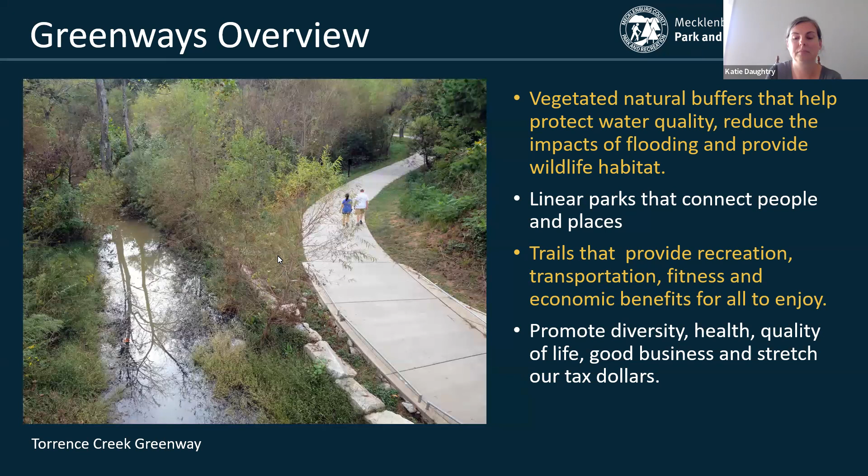In both of our community surveys done with our master planning efforts back in 2015 and then the current one in 2020, greenways have been the number one amenity requested by residents. Our current master plan calls for over 300 miles of greenway trails along creeks and streams and 200 miles of urban trails that would run along roadways and through urban areas. Currently, more than 55 miles of Greenway trails are complete, with a goal to add 30 miles of new trail between 2019 and 2023. To accomplish that goal and meet community demand, we and our partners are working on an accelerated Greenway plan that includes over 40 miles of trail currently in design or construction.

This is a map of those two programs: our capital improvement funded projects, which run from 2019 to 2023, and our accelerated Greenway projects. So Briar and Little Hope Creek was a capital improvement plan funded project, meaning it was funded through that 5-year cycle by the Board of County Commissioners.

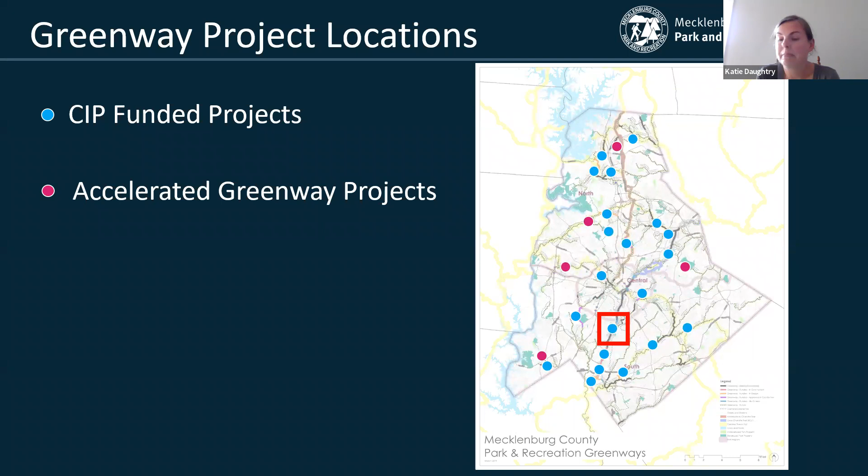The section in the middle is Cross Charlotte Trail, currently under construction by the city, running from Brandywine Road to Tyvola Road. The last segment on the right is Briar Creek, running from Cross Charlotte Trail under Park Road to Manning Drive. These 3 critical pieces of our Greenway system will connect thousands of residents through an uninterrupted, mostly off-road experience of trails.

To places like Uptown, Pineville, Ballantyne, and Noda. In total, these sections of trail, once complete, will connect to over 5 miles of existing trails to the north and 16 miles to the south.

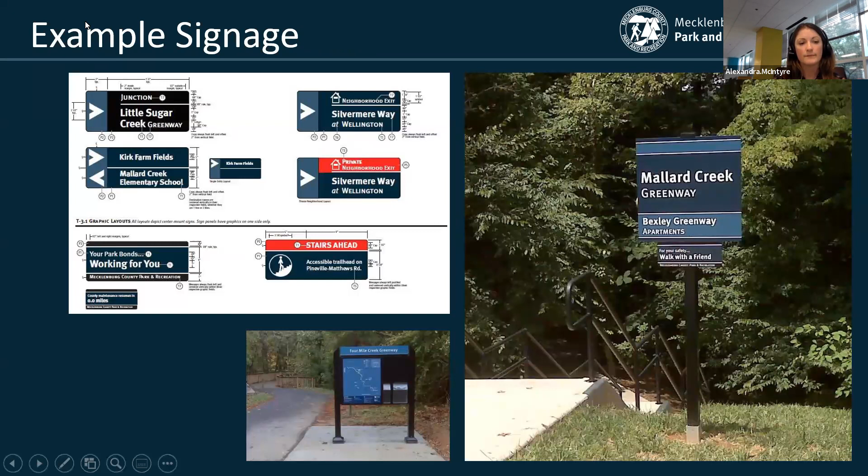Thank you, Alex. So I'm sure for those of you who've been on our greenways very much at all, this will look familiar to you. This is an example of our wayfinding signage package that we use across the entire county.

We have pedestrian scale signs at entrances and along the trail to indicate mile markers. At points, we also include kiosk signage to show maps, rules, and other important information. In addition to signs, benches, garbage cans, and mutt mitt stations will also be provided at various points along the trail.

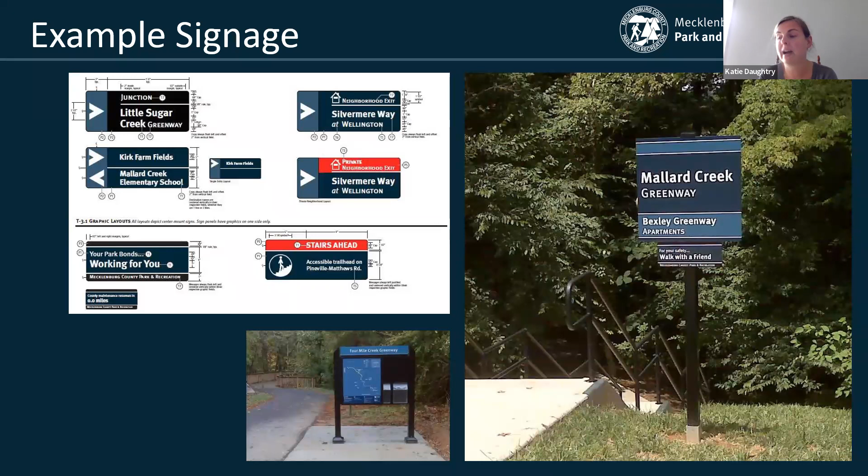So again, just to recap, we are currently in design on this project, and we're about halfway there, I would say. We hope to wrap that up sometime in the fall, with the idea that we would go out to bid in the winter and start construction sometime in the spring.

So before we open it up to this group for questions and answers, I would like to touch on some questions that came through the public input site, because obviously we get feedback there, and we want to make sure that the entire group gets the benefit of hearing some of those questions and answers as well.

So the first one that came through is a question about whether we were planning to add any trail off Seneca Place. Currently the closest planned trail to Seneca Place will be the connection off Keystone Court, which is that northwestern, uppermost portion of the project. I have a map on the next page that we can refer to if we need to moving forward.

The next question we got was just a general concern about tree cutting. So the alignment is meant to reduce impact to trees as much as possible. But of course, with anything like this, some trees will be removed as part of the project.

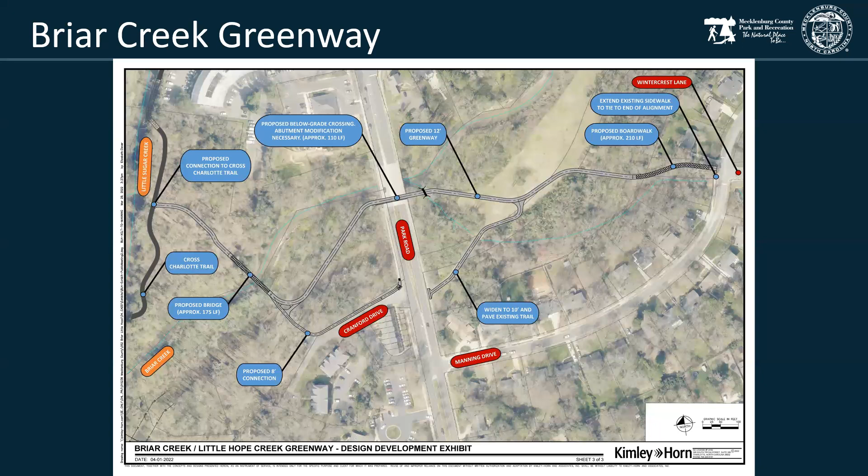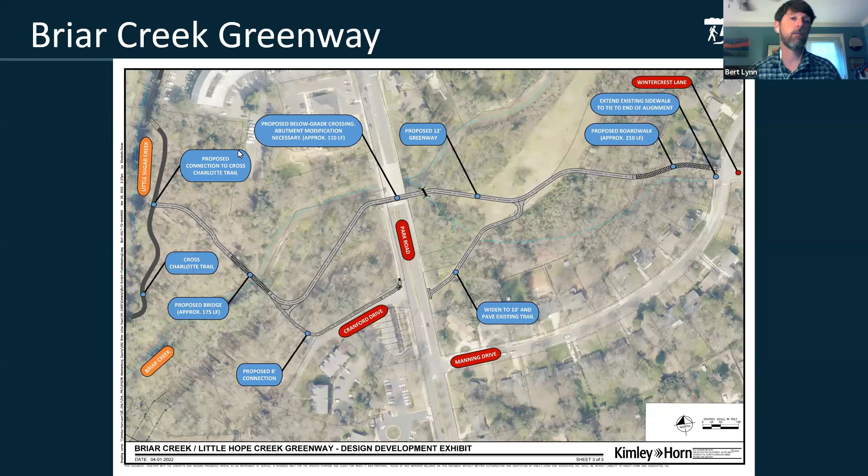So the next question was about some tree clearing that I think is going on now. We haven't started any site work whatsoever as part of the Greenway. So I'm not sure exactly where that would be within the site, and whether or not it may have been part of the work that Charlotte Water was doing with the sewer trunk line

Yeah, maybe I can provide a little additional clarification. So if you can see my cursor, this is Valley Stream here, and the Charlotte Water Project follows behind those houses, but on park property across the creek in this area before it turns north, kind of sandwiched between two rows of homes facing different streets. There was a significant amount of tree clearing that had to be done for that project through the park. And because we chose the route that goes to the west from Keystone Court around the fields here and then through the park, we won't be doing any additional tree clearing in this area at all.

And then we will join this sewer alignment kind of here on the eastern edge of the park, and we'll be in the sewer for the most part, with the exception of some small areas here on the lower end, right as we get to Cross Charlotte Trail. So the tree clearing, if this is what you're referencing, that was from the sewer project — there won't be any additional tree clearing in that area.

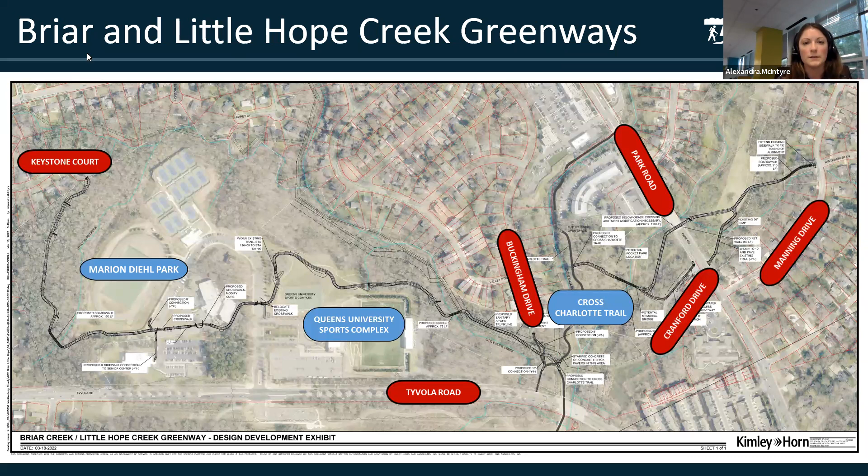It's a little early in the stage - we haven't put together the erosion control plans and determined the construction access point yet, but it's probably worth thinking about using the Keystone Court cul-de-sac as a construction entrance and then continuing down from there. Our construction access is riprap, so big rocks, typically 15 feet wide. But to clarify, we wouldn't do any material storage or equipment storage on Keystone - it would be passing through essentially to get to county property, because we're not allowed to store things in the right of way there.

Thank you for that timeline, that'll help hopefully narrow down who it could possibly be. I'll have to pull up a better map - it looked right along where the proposed path is, where it was kind of cleared out and widened, about a 10-foot wide path kind of thing. Okay, we'll do some internal investigation to see if we can figure out what that was. One of the downsides of having such a robust system is that sometimes we don't know everything that's happening everywhere, but we'll certainly look into it.

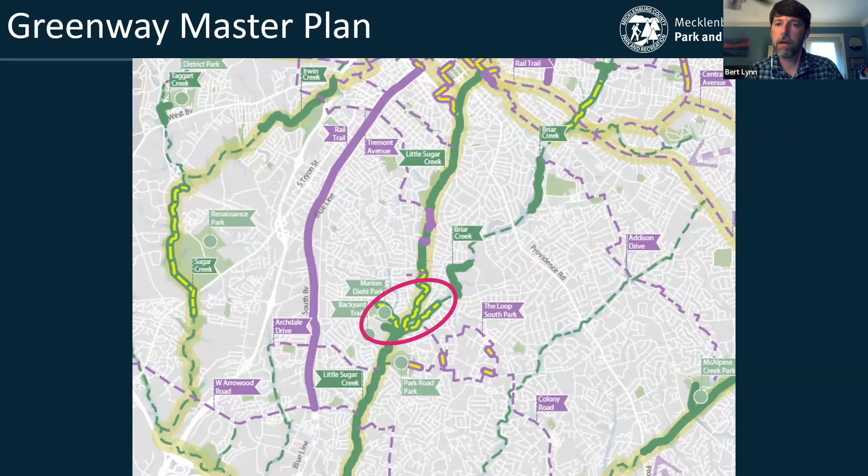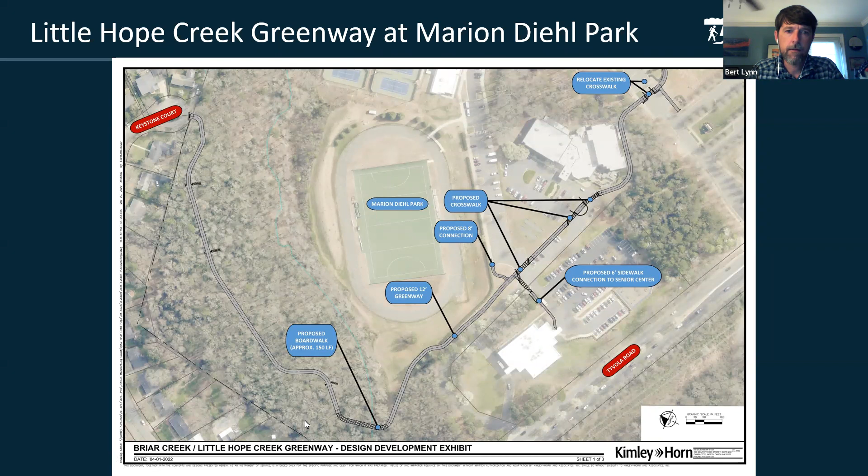Let's see. Where does the bridge across Little Hope Creek behind Marion Diehl, where is that located? So if we could go maybe to that. Next slide. There you go. Yep. So it's directly adjacent to where some of the activity for the sanitary sewer project was, down the hill from the field house and in the athletic field for Queens there.

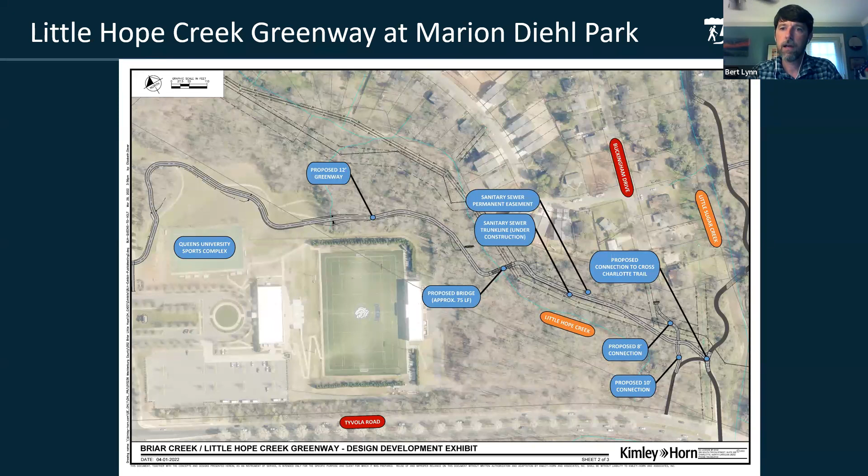We had a couple of questions about the timeline of the project. And we'll, Katie, if you want to go through that real quick. Sure. So we're in design currently. We're about halfway through that process, and we expect to wrap it up in the fall. We hope to have all of our permitting done so that we can bid the project out in the winter. And then construction, we anticipate to start in the spring of 23. So provided that we don't hit any major hiccups along the way, then you should see us out there starting early next year.

And then we had another question about whether or not we may be able to make a connection along the sanitary sewer corridor up to Seneca Place. Andy, it's not going to be part of this project because we're not budgeted for that. Also, Charlotte Water easements don't include the use of greenways within the easement language. And so we would have to go through and work with each individual property owner to get the ability to go in and make that connection. So I won't say it won't ever happen, but it won't happen as part of this project.

I did get a direct chat question. Let me move up to it and see it real quick. The question was, are we planning on building any additional parking or restrooms or anything of that nature as part of this project? And the answer is no. I guess one of the great things about the route that we've selected here is we're able to utilize the parking within the park here, as well as the restrooms at Marion Recreation Center and the Senior Center. So we don't plan to go in and build any of those in any areas as part of this project.

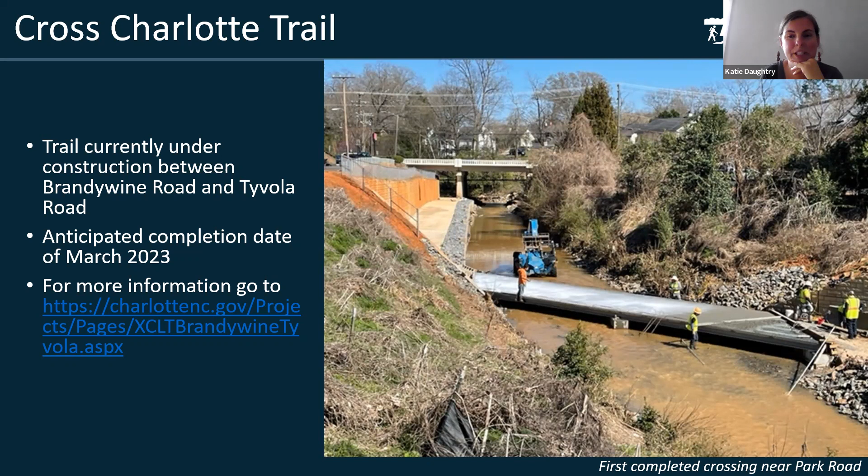Are they going to replant those trees in the corridor along the stream that they took out for the sewer project? Unfortunately, for the main easement for the sewer, you can't plant trees on top of sewer because it creates all sorts of issues long term. But to Bert's earlier point, in areas where they have really wide temporary construction easement, which will revert back to the county after their project is done, we can go into those areas and replant some. So as we get into this a little bit more, we can talk about what a planting plan might look like in that area, but unfortunately we can't plant all of it.

This is Jenks Ravenel. I have one other question. Somebody said that you guys were not going to have another one of these meetings. This thing's been very helpful, and I would really like to know why not. As we get further along, especially as things come up, can we not have these kind of things on a regular basis?

So typically, on these projects, we reach out to the public and have a formal meeting once, but our public input page, which the web address is up on this slide, is the place we use as a clearinghouse to provide updates or additional information on any changes that may have occurred. We really like to use that as a platform to stay connected throughout the duration of the project. I don't want to say we wouldn't hold another meeting should the need persist, but we don't typically hold those types of meetings once we're in the throes of construction.